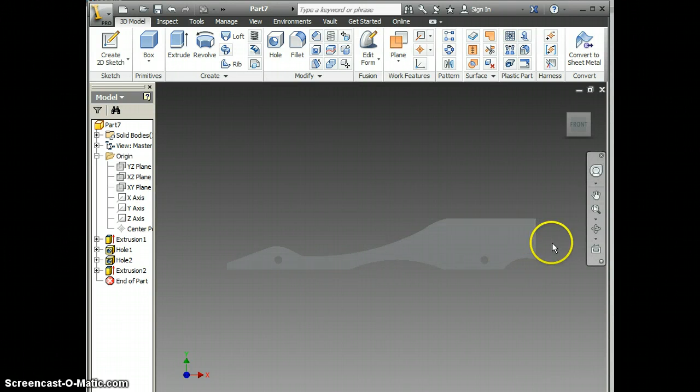So back here on Inventor, what makes this so difficult are these curves. It does not always want to pick up the curves and cut them when you want. If your whole dragster body is curved, then you're going to have to use work planes and sketches to get a sketch on there. But I have a nice flat spot on the bottom and also on the top, so I could draw it in either place.

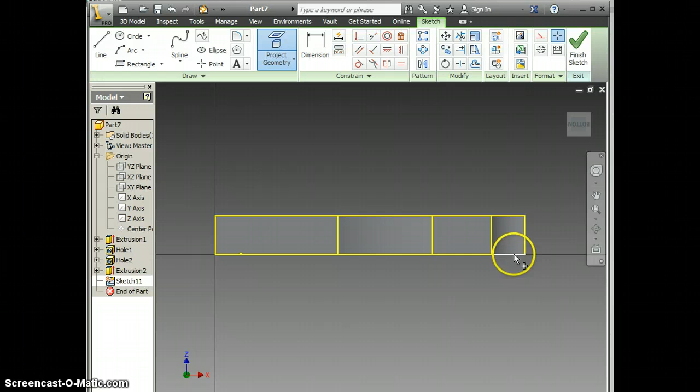I'm going to rotate it around to the bottom. I'm going to put a sketch on the bottom. And then again, it's very important for me to project all of this geometry so that I've got all of these edges that I can see and use as I'm making this next drawing.

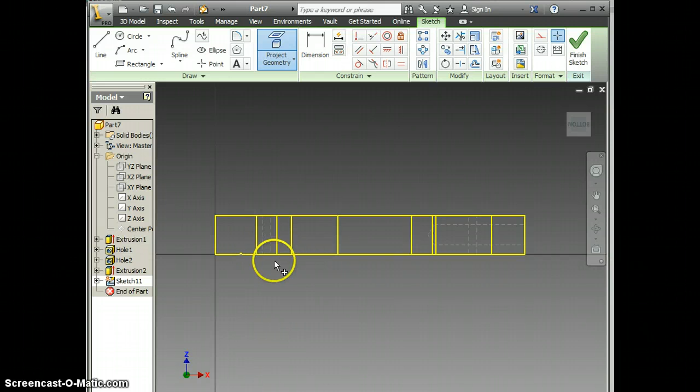Okay? I'm going to switch my view back over to the wireframe with hidden edges so I can see where my axles are and everything. And I'm going to go back to my project geometry for just a minute because this line, this line, this line, I'm just going to project the ones that are not the axles. So you can see my two axles there. You can see my air holes that I need to avoid.

I also like to trace over what I've drawn with the rectangle tool, and then take a line and put it right down the middle, like so, so that I know where I'm going to mirror that around.

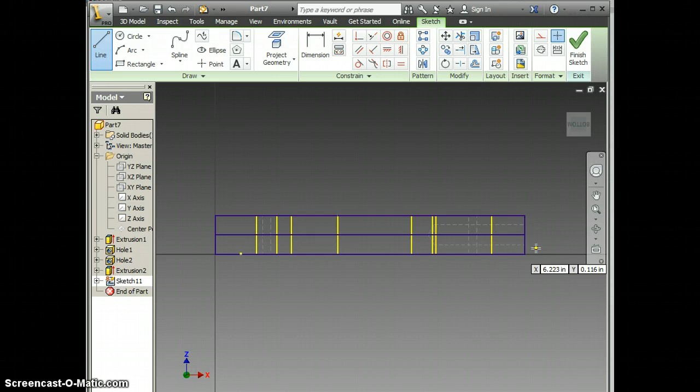Another thing, I know that my part is 1/4 of an inch thick in the middle, which is our minimum. So I like to draw another line in there and space these 1/2 of 1/4. Okay, so that would be 0.125. Space them 0.125 apart because that shows me how skinny I can get on my car.

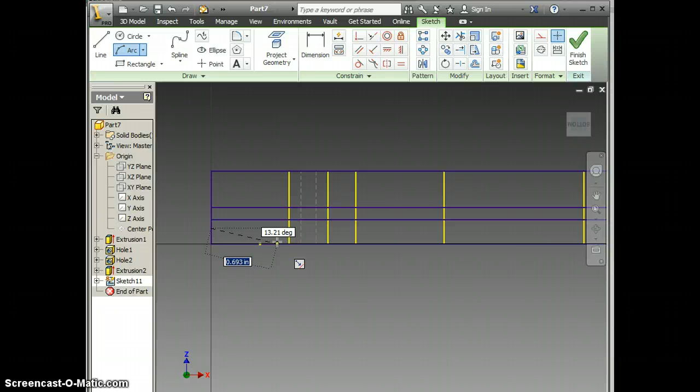Now I want to just try to draw one side of my shape, and you want to be really careful to lock these into the edge. And then also, you don't want to end up outside the lines a little bit or anything like that, because that's when a lot of times Inventor won't pick up where you're wanting to cut at.

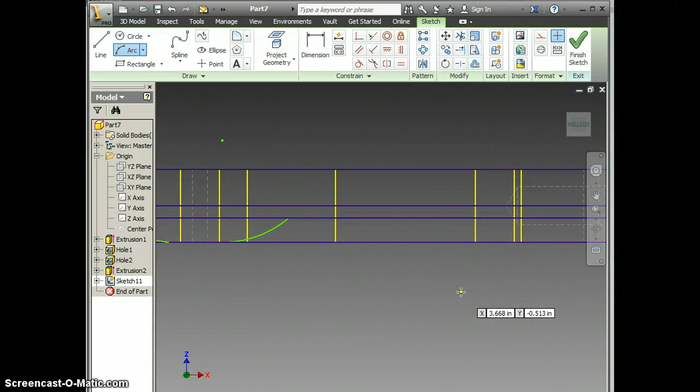So I'm going to go around the axle on one side, around the axle on the other side, and I'm just kind of eyeballing it here. And then I also kind of came back out here, back towards where my drill hole is. Maybe something a little bit like that, okay?

Now that I have half of my profile drawn, I'm going to come up here and I'm just going to draw some of these lines in again to make sure that the computer picks them up, even though I traced it with a rectangle already.

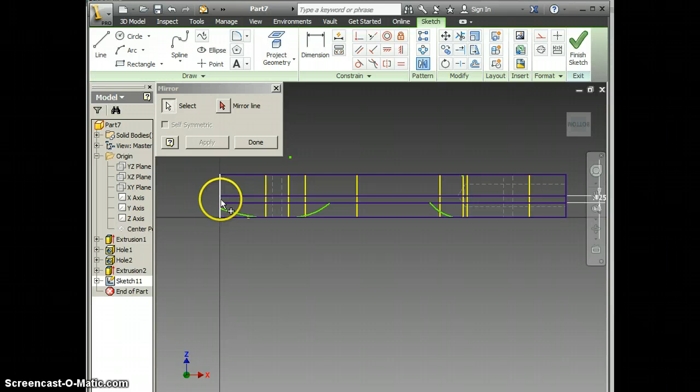Then I'm going to come up to the mirror tool. I'm going to click on that. Now it's asking me what I would like to mirror, and I've got to pick every single line on this side of the center line, including the ones that I drew, and the edges, okay? So it looks like everything that lit up blue is what I clicked on, and that looks like all of my features on this side. So my mirror line is going to be this one, right in the middle that I drew.

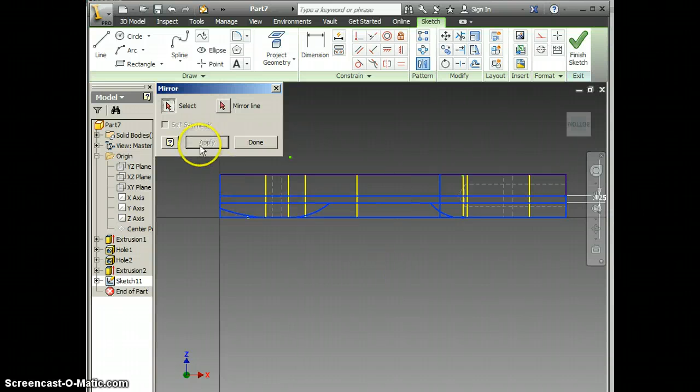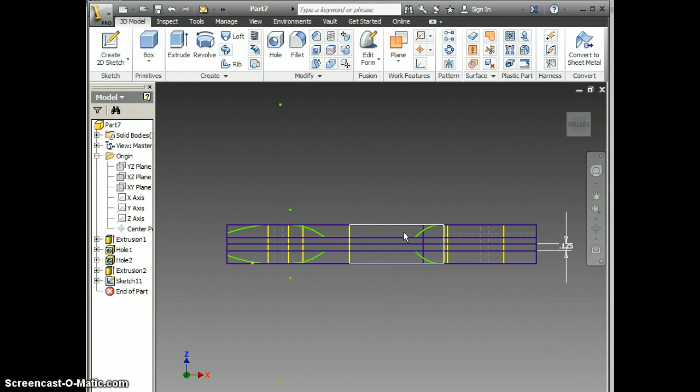And now when I click apply, all of these features are going to show up on the other side. This is where it can get a little bit frustrating, but what you need to do is finish your sketch and go in and try to extrude all of these shapes out. If they will not extrude, then you're going to have to go back in and trace over the lines. You may end up doing this in multiple sketches, and I will help you with that because, like I said, sometimes it is a pain. But that's your basics on using the mirror tool, so you can try to extrude your top view.